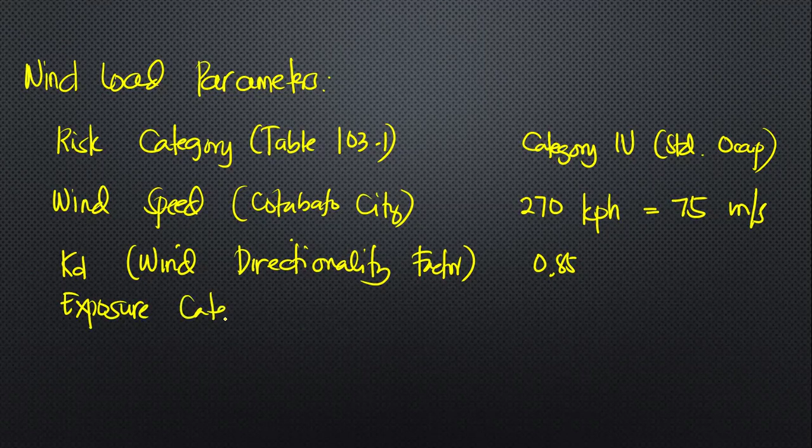Okay, next is exposure category. So you look for section 207A.7. Okay, hanapin natin si section 207A.7. Yeah, section 207A.7. Hanapin natin yung kanyang exposure.

Next is the topographic factor, K sub ZT. So you look for table 207A.8-1. Okay. So this one is our table, topographic multipliers for exposure C. So ito ibig sabihin ng ating topographic factor.

Pag escarpment, the direction of the wind, pag mayroong bundok, the wind is being sped up, upwind, and this one is the downwind. Pag 2D ridge or 3D axisymmetrical hill, the direction is upwind and downwind. If the site conditions and locations of the structures do not meet all the conditions, then we are allowed by the code to use K sub ZT equal to 1.0.

But we can use the formula K sub ZT equals 1 plus K sub 1, K sub 2, K sub 3. So K1, K2, and K3 can be determined from this table. Now, what is this H over L sub H? Yung H natin represents this, the height of the mountain. Ang L natin is from this point up to this point.

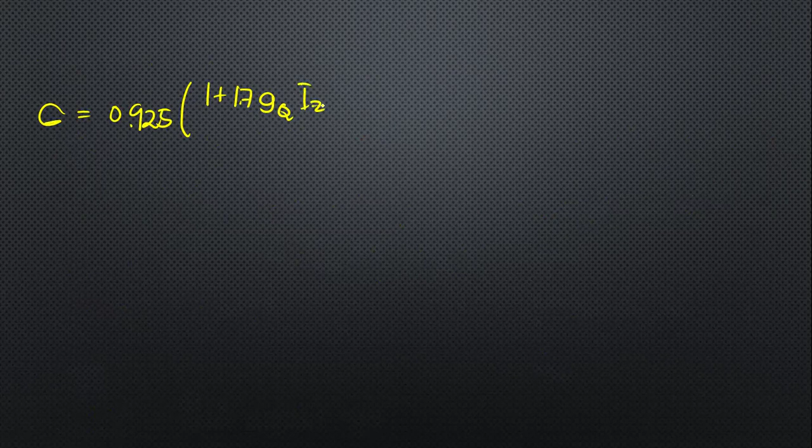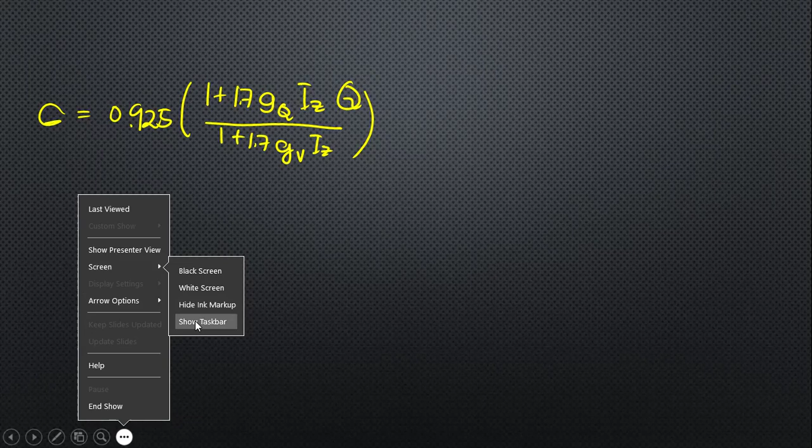Our G is equal to 0.925 multiplied by 1 plus 1.7 g Q multiplied by I sub z multiplied by Q, over 1 plus 1.7 g. Wala ba siyang bar? Correct daw. 1.7 I sub z. Okay. So 1.7. Now, what is the value of I sub z?

Your I sub z is given by this formula, c multiplied by 10 over z bar raised to 1 over 6. What is z bar? Your z bar is 0.6 h. What is h, the total height? 4 plus 9 times 3, so 27 plus 4, 31. So that is 31 meters. So 0.6 times 31.

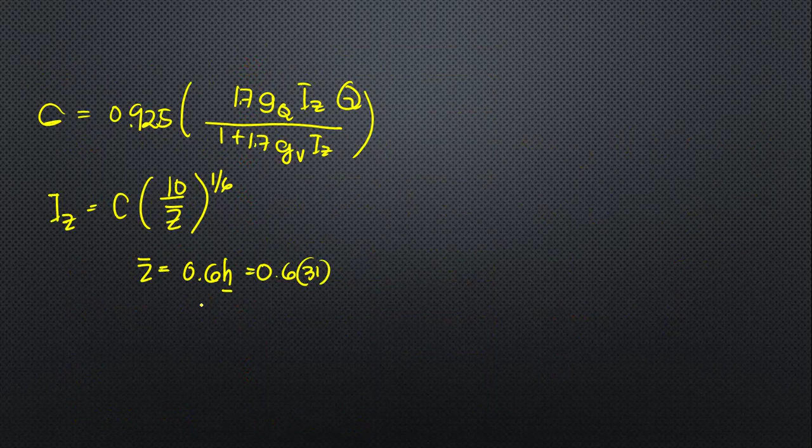You cooperate. 0.6 times 31 is 18.6 meters. Compare natin sa 9.14. So which is greater, so it must be okay. Then compare natin sa z minimum. Yung z minimum natin is 9.14 based sa ating table 207A.9-1.

Meron ng I sub Z. Ito, G sub Q. Ito yung capital Q. G sub V. Dito lang galing yung formula na yun. Okay. Your G sub Q and G sub V can be taken as 3.4. So meron na tayong value ng G sub V, G sub Q, meron ng I sub Z. So what is unknown is yung Q na lang.

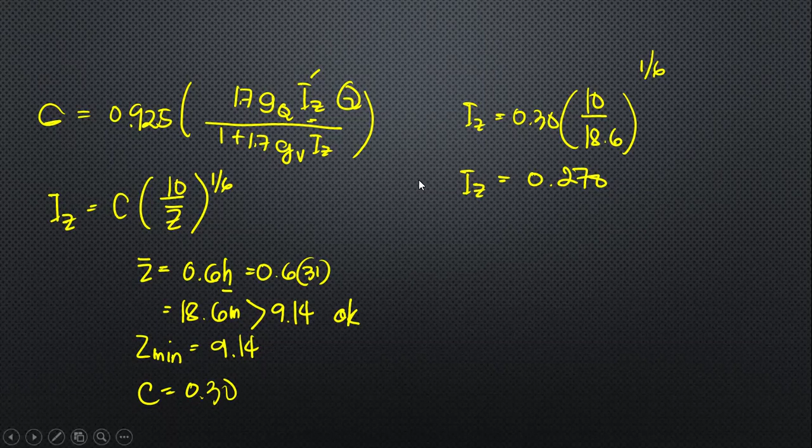Okay. So, ito yung ating height above the ground level. So, starting with 0 to 4.5. So, ano yung height natin? No, starting from the ground. 0. Di ba yung first natin is 0 to 4 meters. So, our value is 0.57. Tama ba? Now, the next height ng building natin is, ano yan? 4. So, 4 plus 3 is 7.

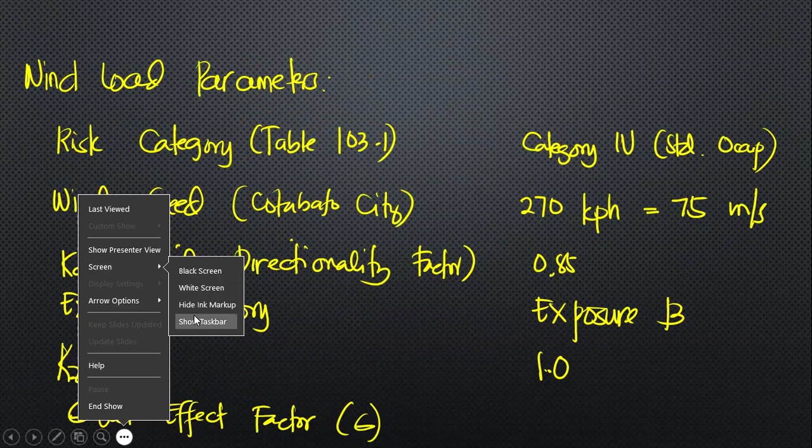So, that becomes 7. Now, this is 6 meters and 7.5. Nasaan si 7? In between nila, within this value. So, therefore, you're going to have this linear interpolation. 0.62 minus x over 6 minus 7 is equals to 0.62 minus 0.666 over 6 minus 7.5. What's the value of x? That is your value. Anong value niya? Show nyo.

Then, next floor. 7 plus 3 is 10. Diba? Saan si 10? Between 9 and 12. Calculate na naman. Then 10 plus 3, 13. Saan si 13? 12 and 15. Plus another 3, 16, so between 15 and 18. Plus 3, 19, between 18 and 21. Plus 3, 22, between 21 and 24. Plus 3, 25, between 24 and 27. Plus 3, 28, between 27 and 30. Plus 3, 31, so between 30 and 36. Okay, yan ang value dito.